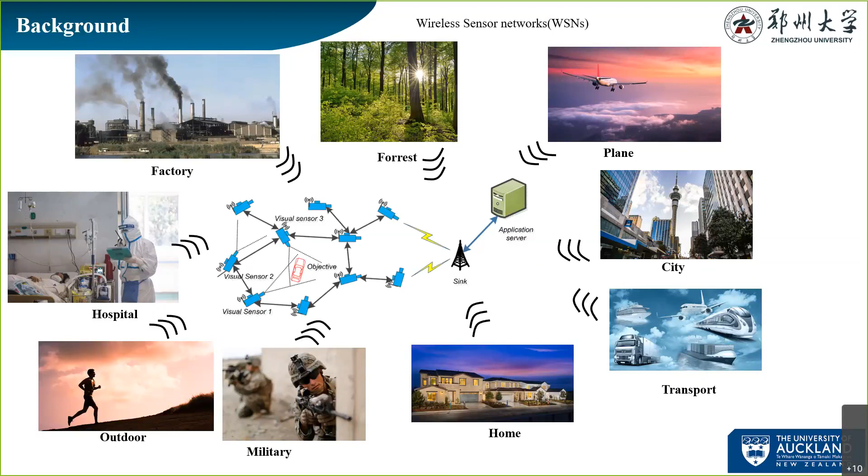Unfortunately, it is quite hard to power these sensors because there are large amounts distributed everywhere, and we need to power them continuously without frequently changing batteries. Fortunately, nowadays we have new technologies, for example energy harvesting, which can be used to power such low power grid equipment. Energy harvesting is low power, sustainable, and does not need battery changes, so it is a good way of powering wireless sensor networks.

Generally speaking, energy harvesting has the following ways: for example, solar, waves, tide, vibrations, wind, thermal, or radio frequencies. So let's summarize: energy harvesting is low power, continuous, and no battery changes needed.

But among these types of energy sources, I think wind energy or flow energy is very good because it is not constant for the weather.

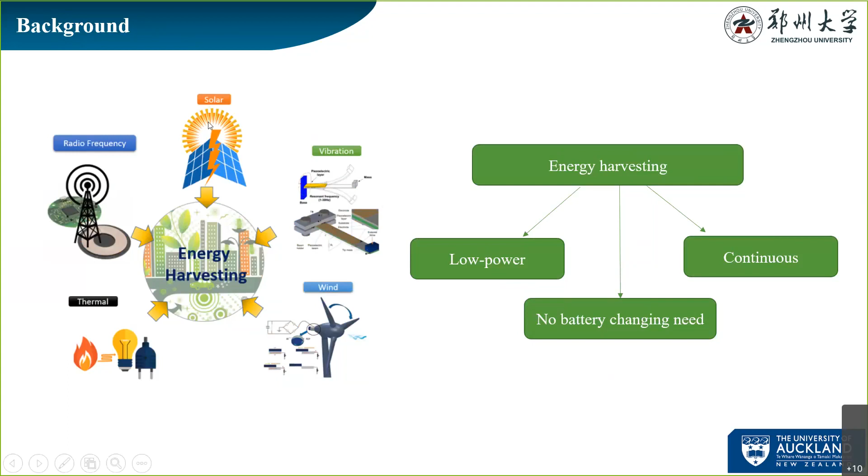However, for wind energy, some traditional wind generators are usually designed very big, as you can see, because it is based on the electromagnetic principle. The biggest windmill generator in the world is located in Denmark, type V164. It has a height of 220 meters, and its blade is as long as 80 meters.

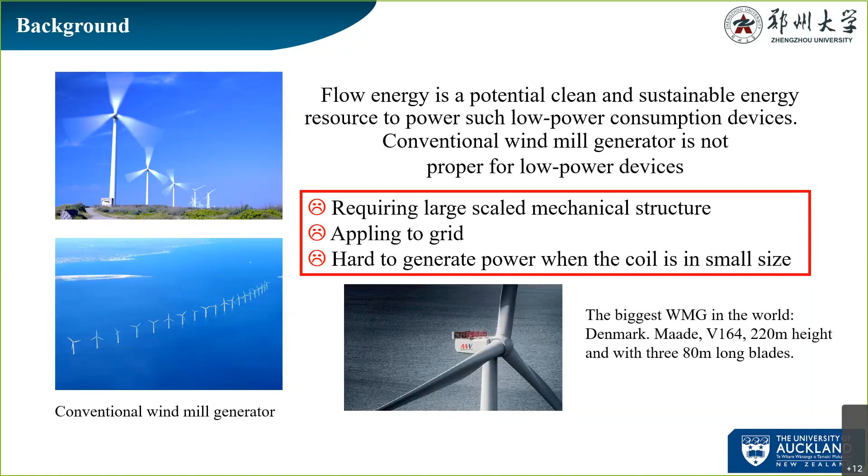But as mentioned before, we just want to power low grid electrical equipment, so we do not need such big size and big energy. So what do we do? Here we introduce flow-induced vibrations. As you can see from the pictures, the structure has been aroused to shake dramatically in wind or water flow, even at low wind speed. This is called flow-induced vibrations.

We must point out that usually, flow-induced vibrations should be treated as a harmful phenomenon that everyone wants to restrain. But here we can use it to generate power, because it can efficiently transfer flow energy into mechanical vibrational energy.

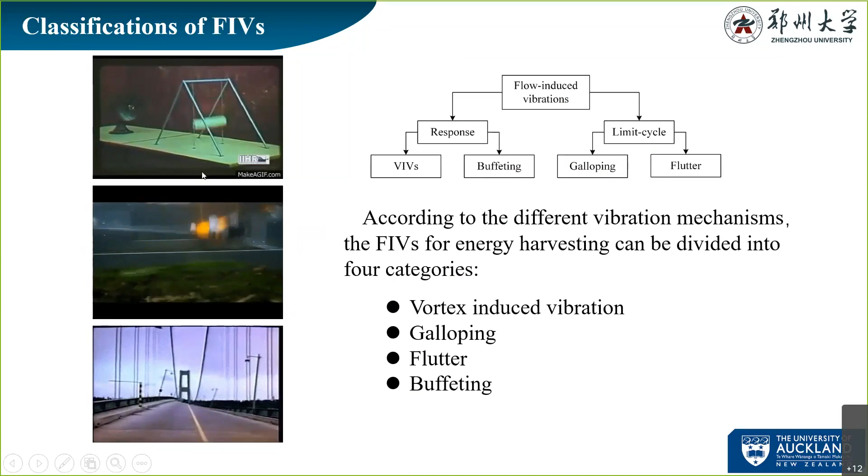Before we know what FIV is, we must know what causes it. As you can see from the picture, Karman first presented this concept in 1911, called the Karman vortex street. When the flow passes the bluff body, behind it will generate a periodical and alternative vortex shedding street, and this vortex shedding street can generate periodic aerodynamic force, comprising lift force and drag force on the bluff body.

And here we must clarify that: usually in our research region, a bluff body with circular round shape we call a cylinder, but if it is not circular, we call it a prism.

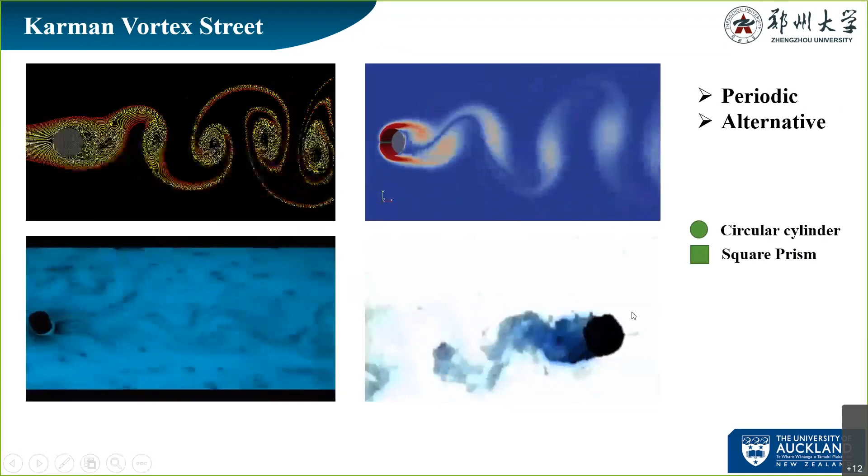As you can see, as a driving force on the vortex shedding street, if we put the cylinder on a spring and add some damping on it, it will become a typical mass spring damping system. And when the vortex shedding frequency gets very close to the natural frequency of the mass damping spring system, it will be aroused to vibrate periodically, and then it is called vortex induced vibration.

Now let's see what is the feature of VIV. There often exist three branches in VIV. Firstly, the initial branch. Secondly, the upper branch. And during the upper branch, one famous phenomenon can be observed. It's called lock-in, and then it will come to the lower branch.

In the upper branch, there exists a special lock-in phenomenon. If the wind speed is low, the bluff body does not vibrate much, the amplitude is very small. But if the vortex shedding frequency gets higher with increasing wind speed, and the frequency gets close to its natural frequency, it will be locked onto the natural frequency, and they will be resonant. During this stage, the vibration amplitude could be very large.

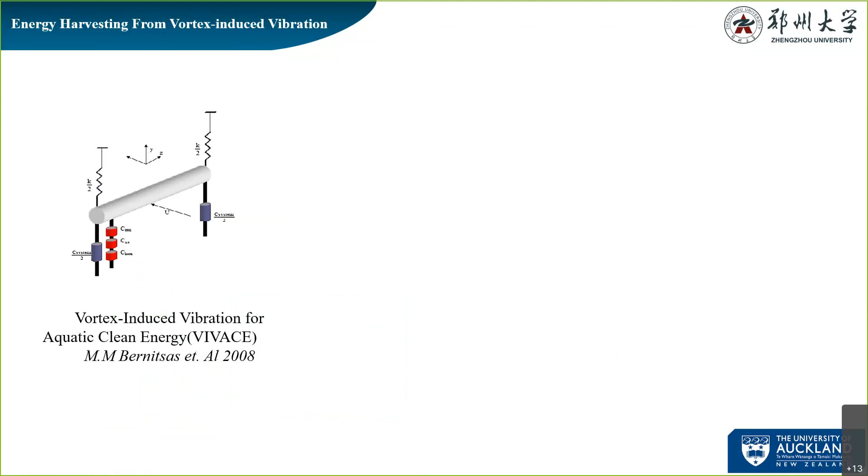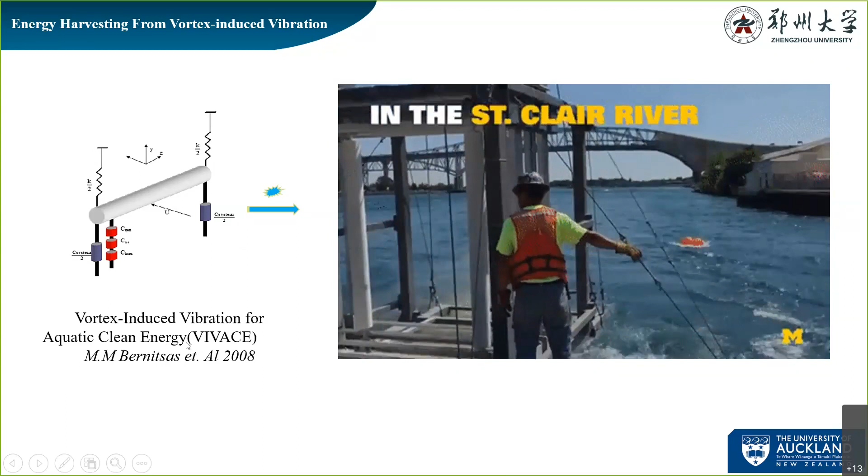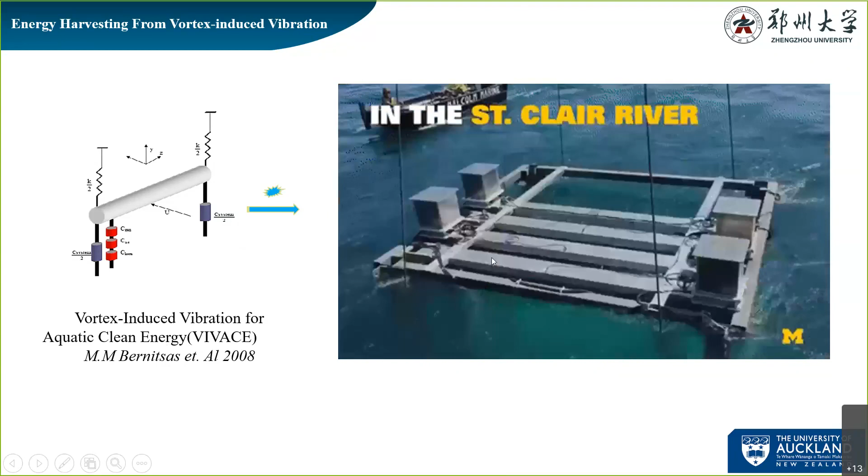The first proposed energy harvester from vortex-induced vibration was presented by Professor Bernitsas at University of Michigan at a conference. He first presented the concept of vortex-induced vibration for aquatic clean energy, also called VIVACE. As reported, the first prototype of this VIVACE has 3 cylinders, and it can power 4 homes per day.

After that, I want to introduce some mechanisms of VIV. As you can see, like other problems in mechanical vibration, we also need to add some semi-empirical equations to describe this problem. Firstly, I would like to introduce this one.

It is called the wake oscillator model, presented by Facchinetti in 2004. This model treats VIV as a kind of forced vibration. Why? Because they assumed that behind the cylinder there exists a wake oscillator, and this oscillator can give energy to the cylinder, making it vibrate, so it is treated as a forced vibration.

How do we reflect this in the equations? The first governing equation is about the cylinder, about its motion, and the second equation is about the assumed wake oscillator. Here you can see that.

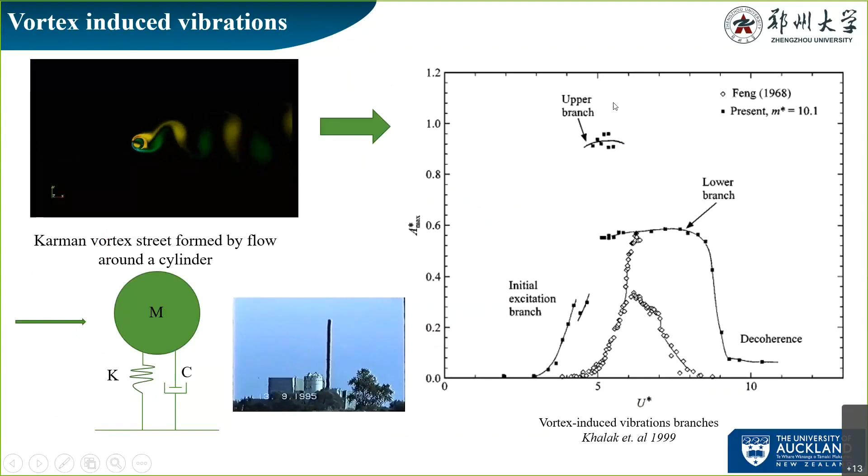That's because, if you look at this, they added some obstacles on the bridge this time, and these obstacles changed the cross sections of the bridge. So it altered the vortex vibrations of the bridge, and it just entered this region. Before, the bridge was in this region, and now it enters this new region, so you can see the amplitude is quite big.

So we have comprehensively talked about the model of a system with one single cylinder. You can see that's only one single cylinder here. But what will happen if we put not only one bluff body?

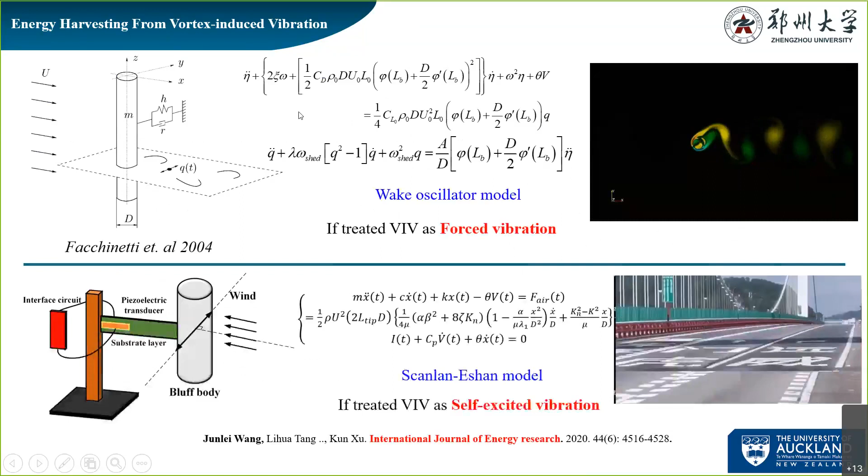Professor Facchinetti also proposed a model of two cylinders arranged in tandem. He thinks that the vortex shedding from the cylinder in the front can effectively influence the vibration of the second cylinder. You can see from these equations there is interaction on the second cylinder. That means the first one still acts as a single cylinder, controlled by these things, but the second one is controlled by both the wake oscillator model and the vortex shedding effect.

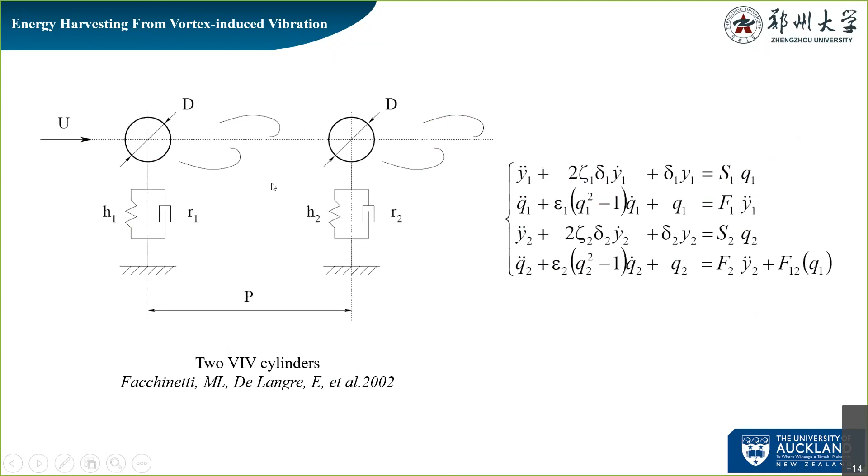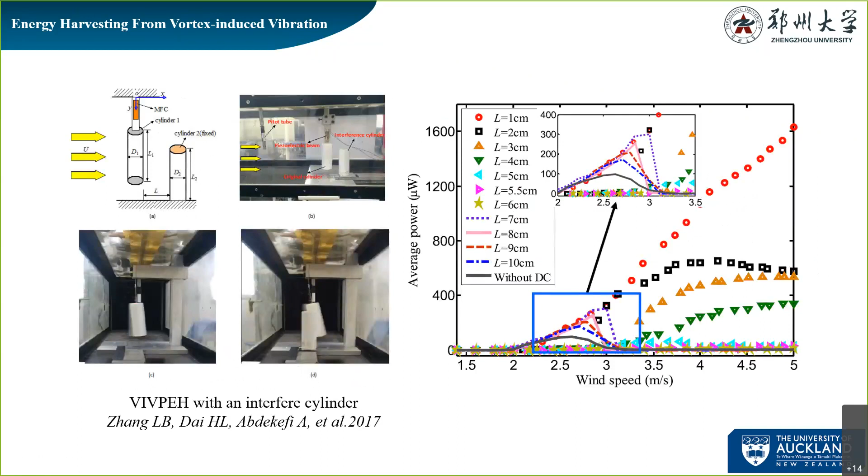So what do we do? It is not easy to model something like this. What can we do to accurately build a governing equation to model such a VIV problem? We can use CFD. CFD technology is very good at solving these kinds of problems.

In CFD there are some important points. Firstly, we must justify whether it is laminar or turbulent flow. In this region, some think the judgment point is whether the Reynolds number is above or below 180, but some say the number is 500. Not sure.

There are quantities of CFD technology, but the most commonly used can be divided into, I think, two types: firstly the finite volume method, and second the lattice Boltzmann method. And about turbulence solving, we can use some, for example, large eddy simulation, Reynolds-averaged Navier-Stokes, or direct numerical solution.

When we talk about Reynolds numbers, because it is a very important number in CFD study, if it is higher than 180, commonly a three-dimensional simulation should be conducted. But if you just want to get the lift force or the vibrational amplitude of the cylinder, a two-dimensional simulation is also, I think, enough. But if you want to accurately get the phase or other things, I think 3D simulation is important.

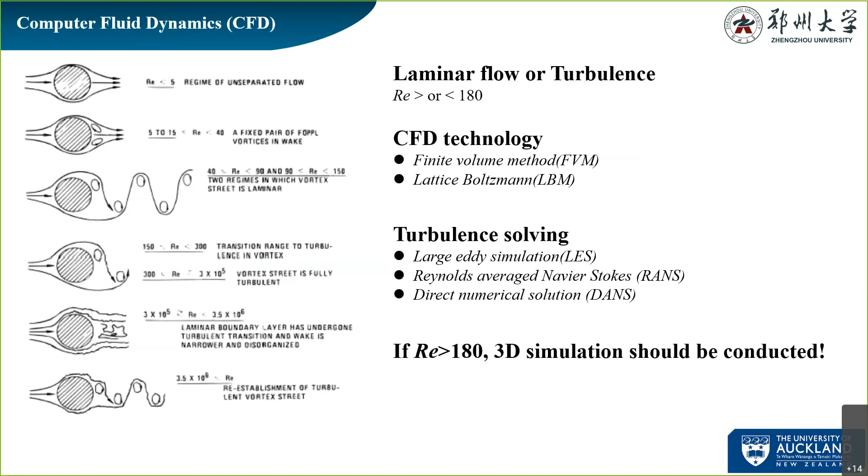So why do we use CFD? From this picture, you can see a typical example of simple vortex induced vibration, and you can see there exists a pair of vortex sheddings in a single period. It is interesting that the blue color presents rotation that is negative, and the red color presents that the rotation direction of the vortex shedding is positive. You can also get the velocity vectors from this picture. It is very real, I would say, not just some easy equations.

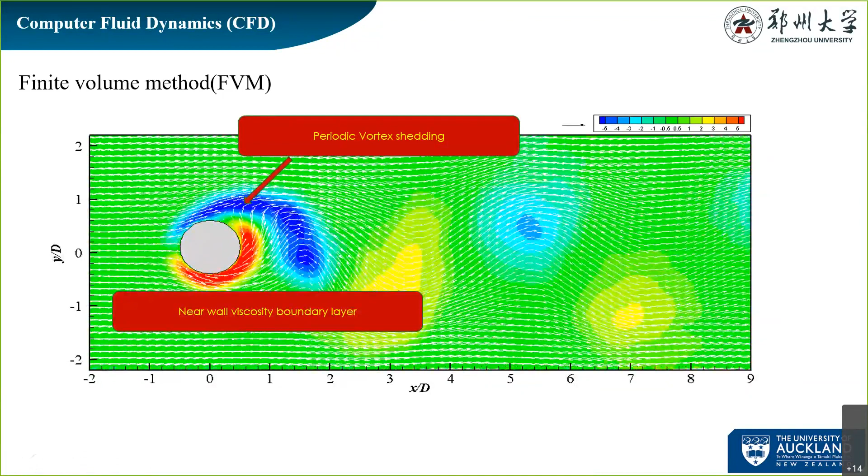Let me introduce some of our recent works. We used the software Fluent, which has a good technology called overlap grid. What does it mean? The green one is the original grid. If we compute a flow-induced vibration problem, we must deal with the problem of grid or mesh distortions - the mesh will easily be broken, and the simulation will be stopped.

But here we use a new overlap grid. That means we put another grid on this hole, and it can transfer some data from the vibrations and the flows. So we no longer need to solve the moving grid to deal with mesh distortions.

Here is a flow chart of the working process. As you can see, firstly we can generate some raw grid and start to assemble the grid. So we dig holes here, and then optimize the hole surface. Then we can establish, for example, this red grid - it is called the overset grid - and transfer back to the assembled grid. Then we set boundary conditions and simulate. At last, we need to judge if it has converged. If it has converged, we can stop the simulation and it is finished, and we can get what we want.

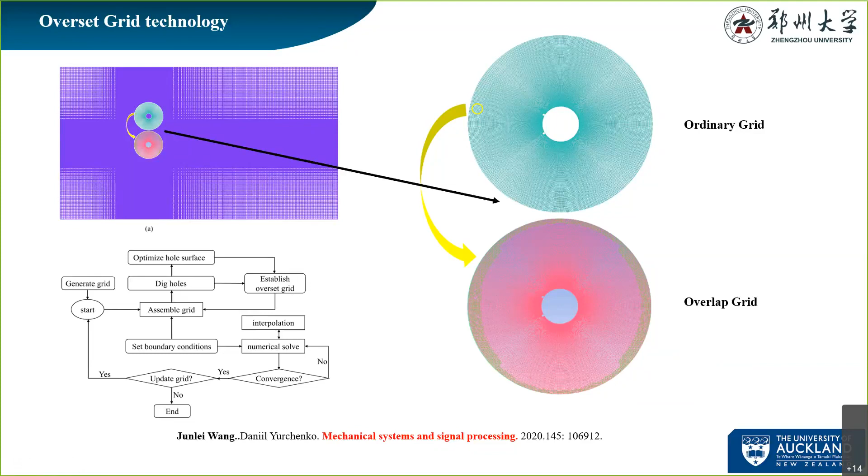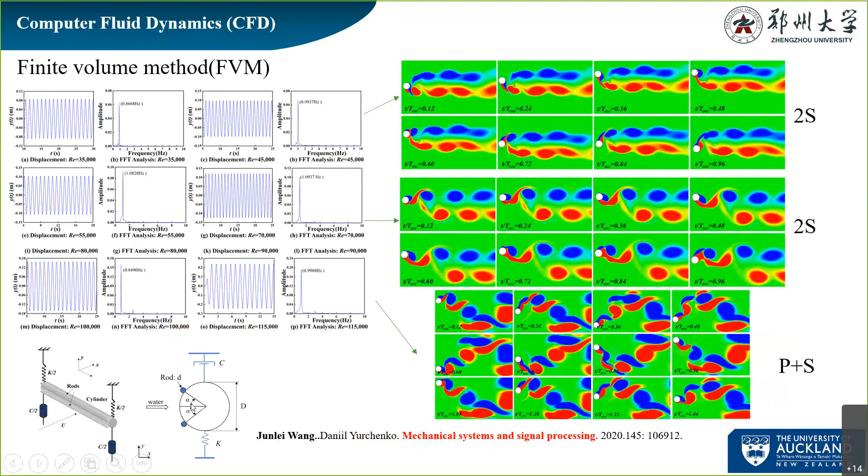Okay, this example contains only one cylinder. If we put in multiple cylinders, what will happen? As we mentioned before, CFD technology is very good at solving such problems. Here we also add an overlap grid to solve this.

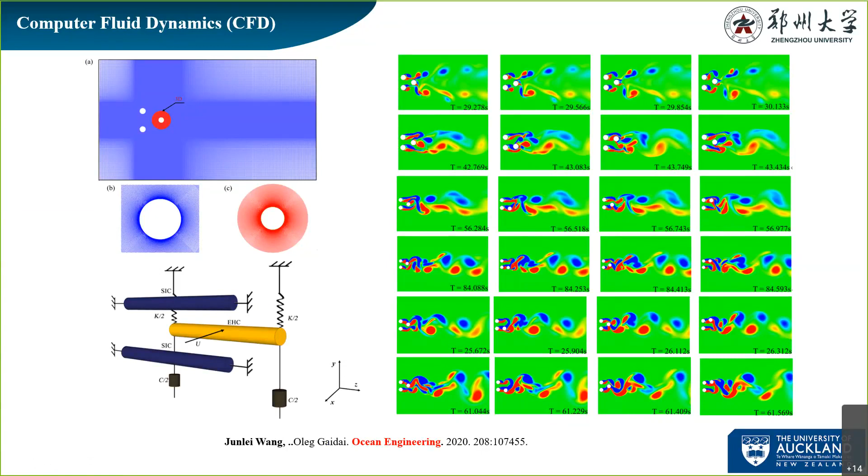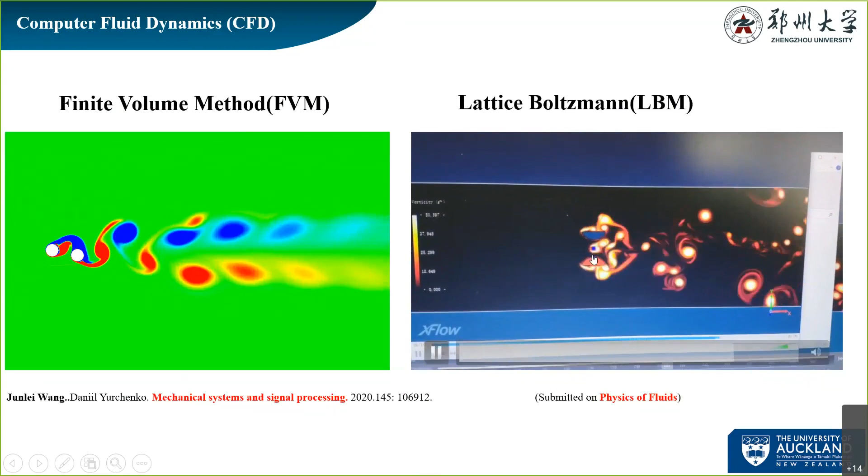And here you can see if we use the lattice Boltzmann method, we get that. Firstly, we do not need a high grid - it is a grid-free platform. It just has a lattice. I think this is good for solving some very hard computations.

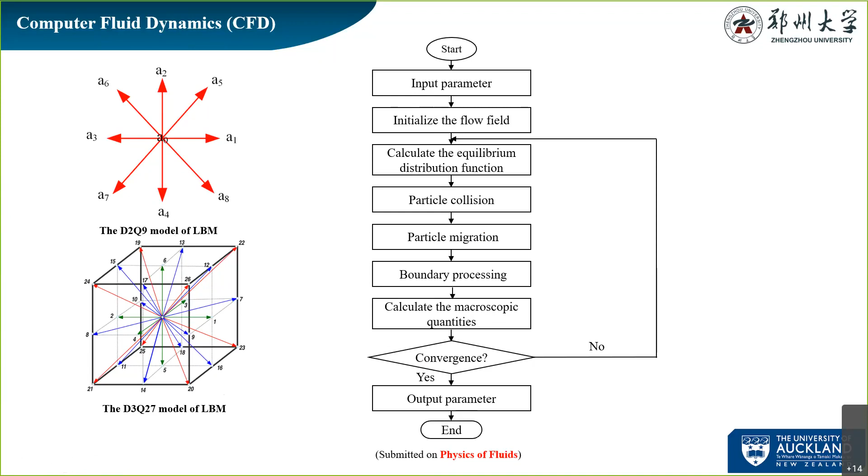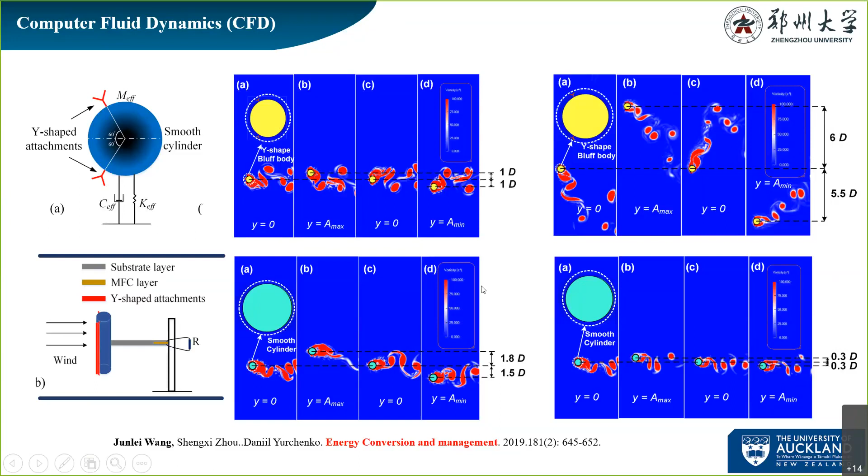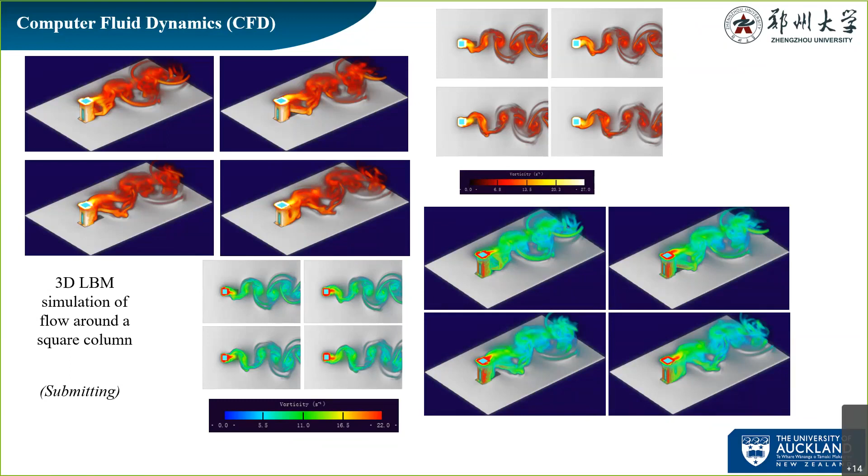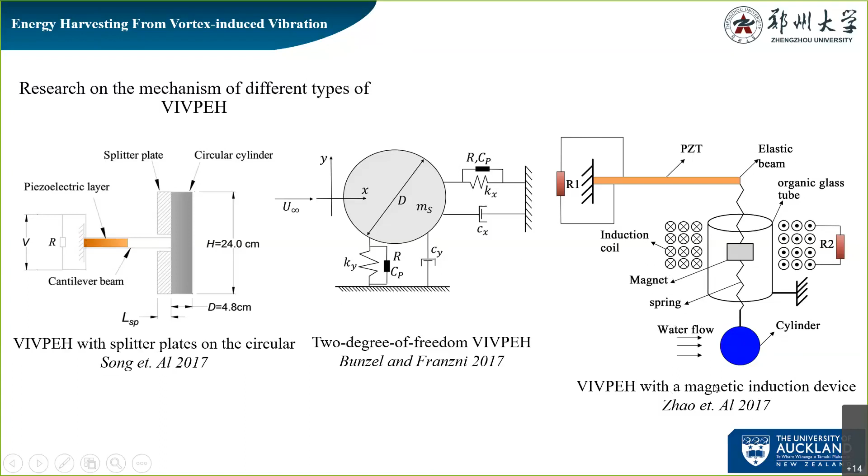Okay, let's summarize the benefits of VIV energy harvesters. Firstly, it has a typical lock-in phenomenon, so it performs high voltage output in the lock-in phenomenon in the special wind speed region. Secondly, we can design such energy harvesters into a very small size, so they can work individually - we do not need to apply them in a grid. That means we can use it at our home or take it with us. And at last, I think it's very important for VIV energy harvesting...

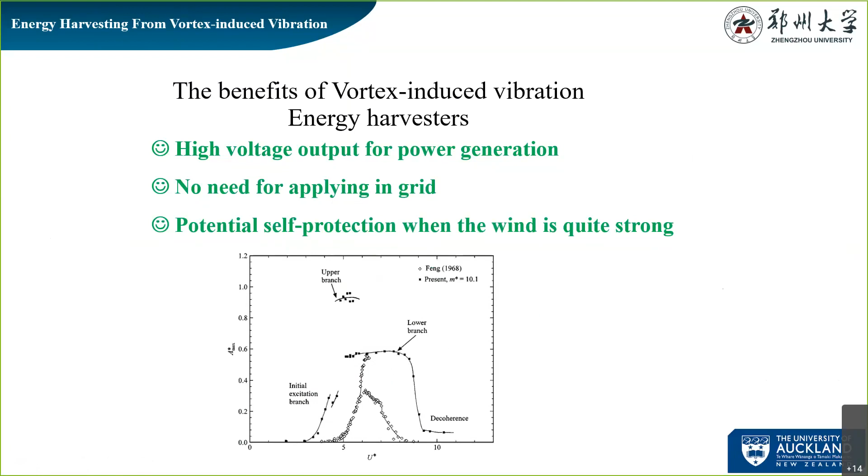...because it has a lower branch, so if the wind speed is quite strong, the vibration will be suppressed. That means if the wind speed is quite strong, the system can protect itself. It will not be damaged even if the wind speed is quite big. Okay.

After talking about VIV, I would like to introduce galloping. As you can see, galloping is a velocity dependent damping controlled instability. This picture is very easy to let people know what is galloping.

Imagine this is a wire line. Firstly, the cross section is round shaped. So it will happen typical VIV. Why do we see that? Because the direction of the movement, or the velocity, is always opposite to the aerodynamic force. That means when you move down, you can inverse the aerodynamic force to the up direction. It will stop you getting very strong.

But if the wire is coated with, for example, ice or rainwater, the cross section has been changed into some shape like this. So what will happen? It will happen that the direction of the velocity is the same as the aerodynamic force. That means if you move forward, and someone has pushed you to move, the movement will become stronger and stronger. So as you can see, the system will be damaged.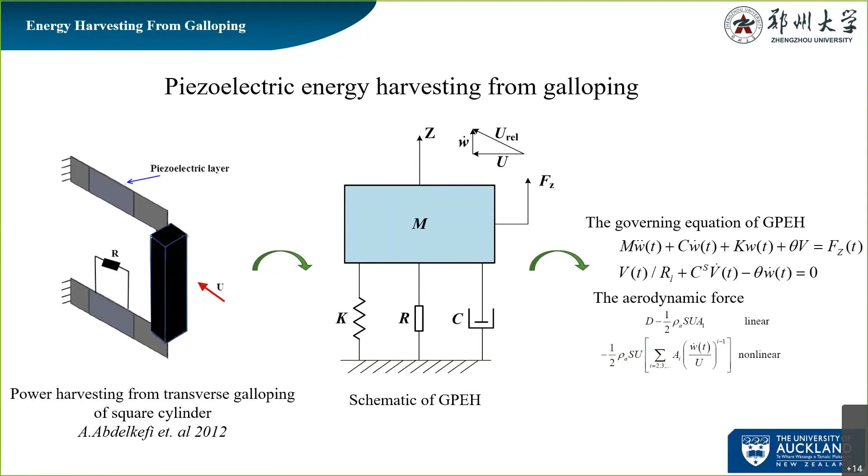So let's summarize the benefit of galloping for harvesters. It is a low frequency and high amplitude oscillation, which means we want high power. If we want a very high power value, we can use galloping. And the amplitude increases with increase of wind speed, compared with VIV. There are two different types of flow-induced vibrations.

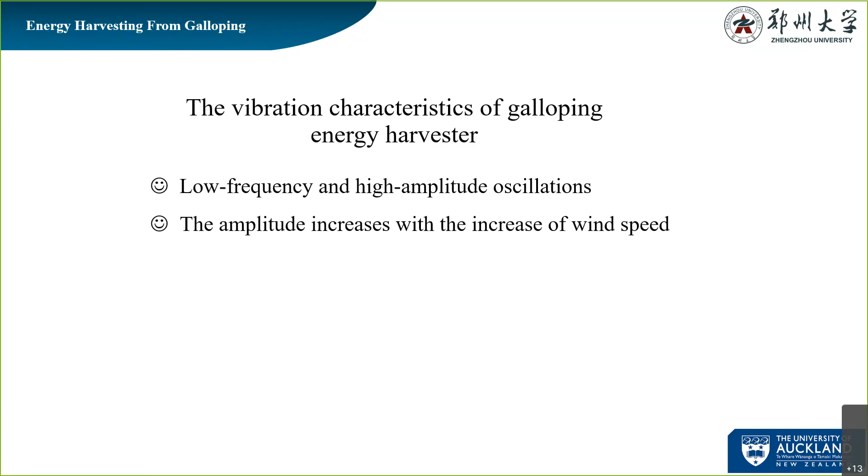We did some experiments to investigate what will happen if we put attachments on the smooth cylinders. We will see that galloping will be aroused. But if we take off the attachments, it becomes back to VIV. That means if we design such an energy harvester, if the wind speed is low, we can take down the attachments. If the wind speed is quite high, we can put on the attachments to harvest the different wind speed energy.

Then we did some other studies to further develop the energy harvesting performance. For example, we added some magnets to make the system become bistable. By using this configuration, what we found was about the second beam, shown here.

The second beam, firstly without the magnets, can only work at about 2.5 meters per second. If we use the magnets, we can find that the cut-in speed will get down to 1.9. This is very good for enhancing the performance of energy harvesting.

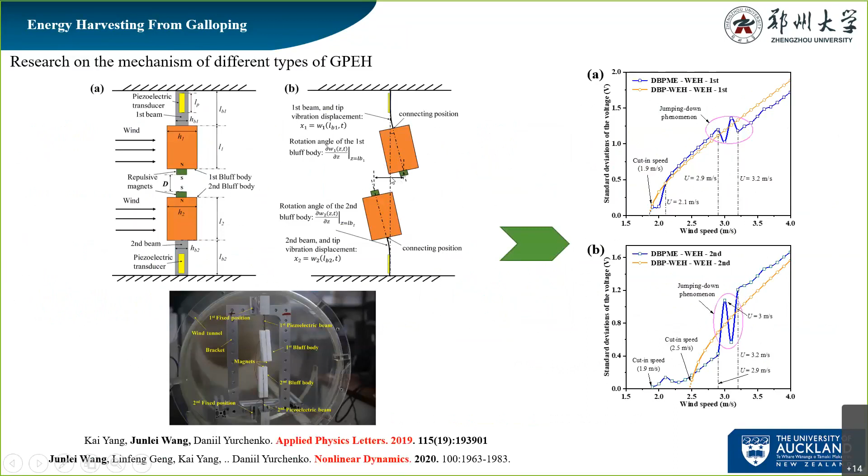But if you enhance the wind speed, that means you add more wind energy to the system, the vibration will get to another potential well. It will break out of the first potential well, and it has two equilibrium points, right? So the amplitude is sometimes positive and sometimes negative.

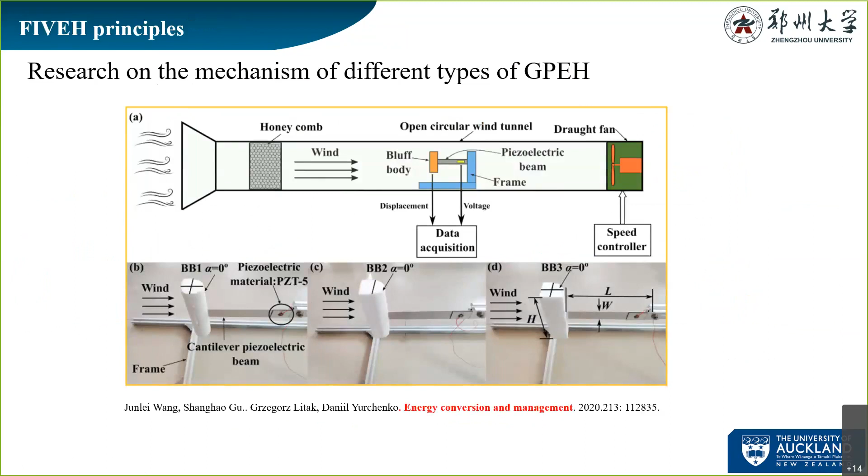Then we imagined what would happen if we combined VIV and galloping, because for simple VIV there is always a round shaped cross section, and for typical galloping it is always a square prism. So we combined the bluff body into this shape and comprehensively did a parametric study.

Fortunately, we found that such a shape of bluff body can efficiently enhance the performance at the traditional wind stage. That means you can see this red line here.

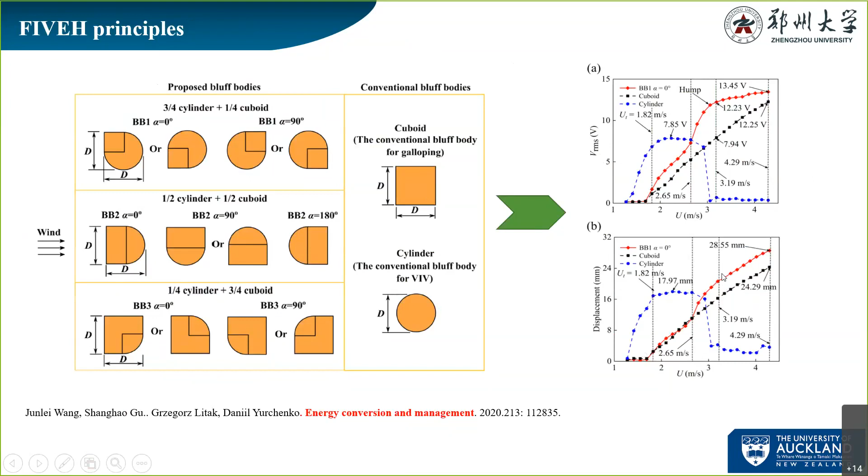We have done some other works. For example, in 2015, Dr. Lihua Tang presented the equivalent circuit study of galloping energy harvester. This function is very normal in energy harvesting from fluid-induced vibrations, but the hard point is that we often treat it as a simple resistance, only as AC.

But if we use DC, this function equation is impossible to solve. So we used this method to solve this problem. We can solve not just AC, but also DC and some other types of circuits, for example SSHI, SCE. So this year we have solved this lack.

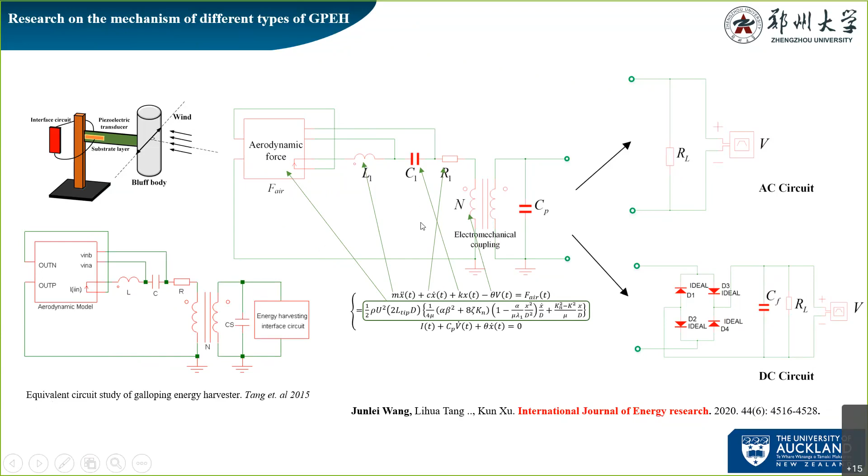We have also done other studies. For example, we studied the position influence on two galloping energy harvesters, and we solved for different incoming wind directions into the energy harvesters, so this design can harvest energy from any wind direction.

Zhao Liya has studied this combined approach. She combined the galloping vibration energy harvester with normal base excitations.

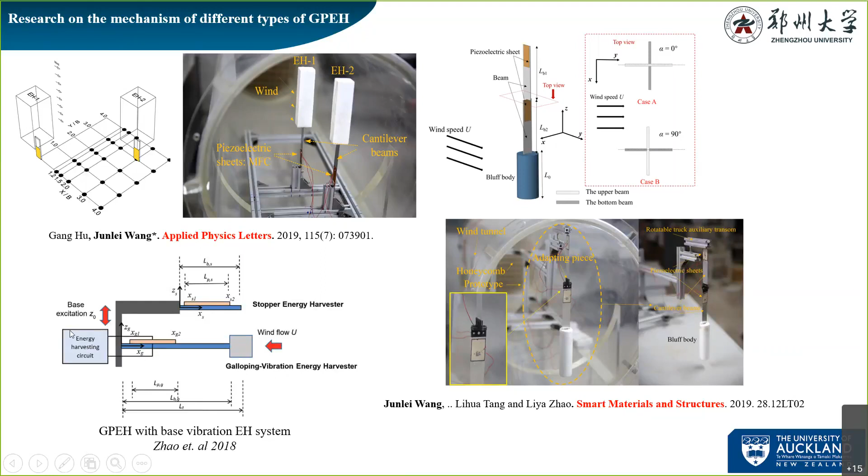Next, some application examples of fluid-induced vibration energy harvesters will be introduced.

This company, around 2014, was first in Spain—it's a Spanish company. It firstly designed a vortex bladeless wind turbine. As you can see, it's bladeless, and they used the principle of vortex-induced vibration. This is maybe the first time I've seen someone build a product using fluid-induced vibrations.

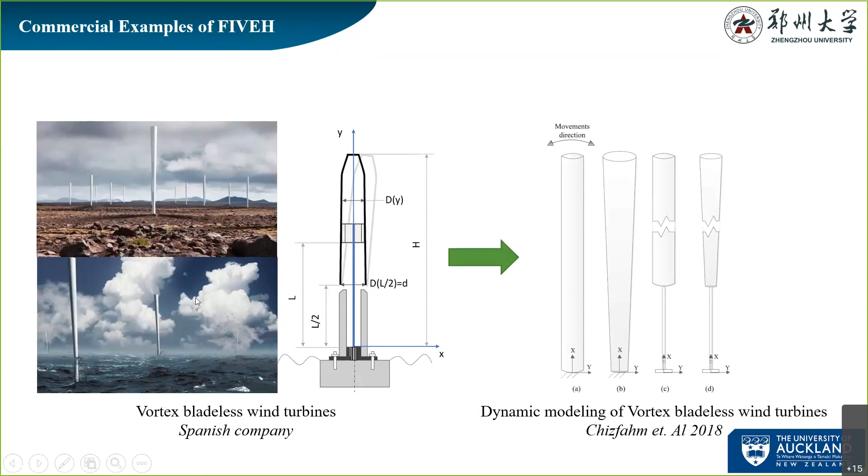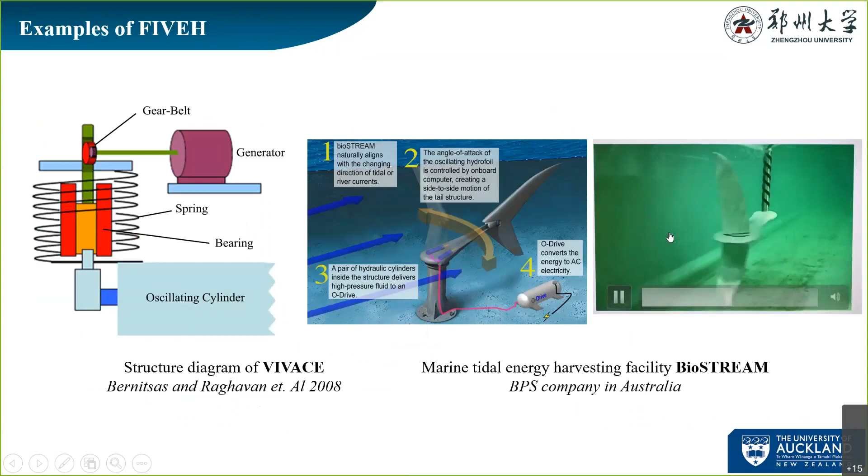And this one is the BPS company in Australia. They designed a fish-like biostream device, called biostream, to harvest water energy. And this one is designed to harvest tide energy offshore.

And this one is designed as a self-powered temperature measurement system using piezo flags.

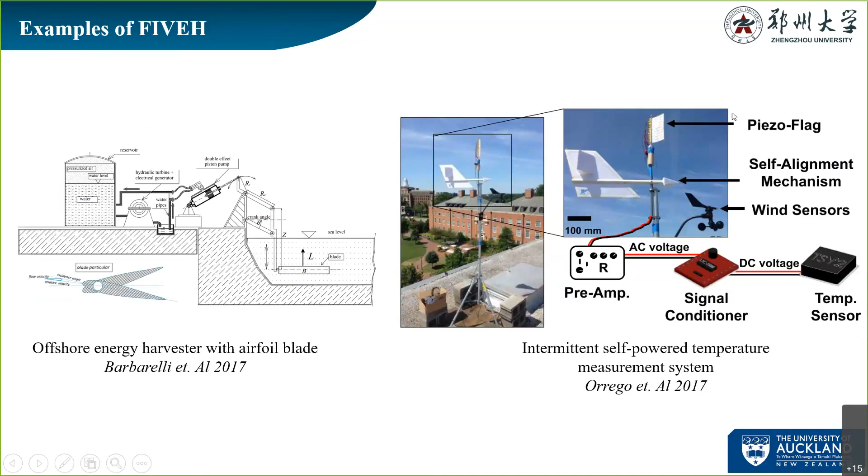I think there still exist some challenges in fluid-induced vibration energy harvesting studies. Firstly, the theories of FIVEH energy harvesting is still not complete. And the flow field is very complex, especially regarding turbulence problems—it should be further studied.

Secondly, I think almost everyone is concerned about the efficiency of energy harvesting. But to tell the truth, I don't think efficiency is very important, because we just need to power some very low-power grid equipment, and we just need it to be sustainable so we don't need to change batteries. So I don't think efficiency is that important.

But if we can find ways to enhance efficiency, it would be very nice to improve this energy harvesting performance, and we can design more prototypes to make it into a production or other things.

And lastly, there's cost. The cost is still very high for me because I usually use piezoelectric energy harvesting, and the piezo sheet is very expensive. For MFC it's about 100 Euros for one piece. So the cost is still high.

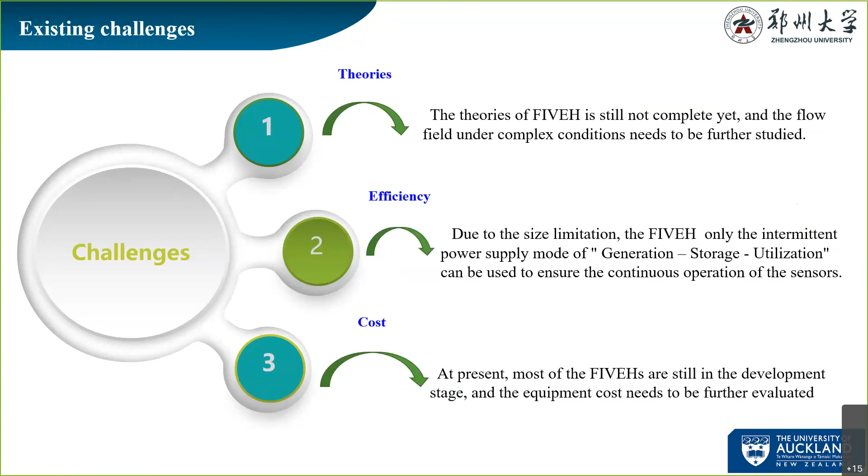So I'd like to make a conclusion of my presentation. Harvesting energy from the ambient environment has a very good perspective because the energy is clean, endless, and unstoppable. FIVs are also a good medium to transfer flow energy into mechanical vibratory energy because of this resonance phenomenon.

And we can use some technologies to enhance or combine energy harvesting from FIV. For example, nonlinear technologies, intelligent regulating elements, hybrid energy harvesting, some new materials, and combining with wave energy harvesting, because wave energy always exists.

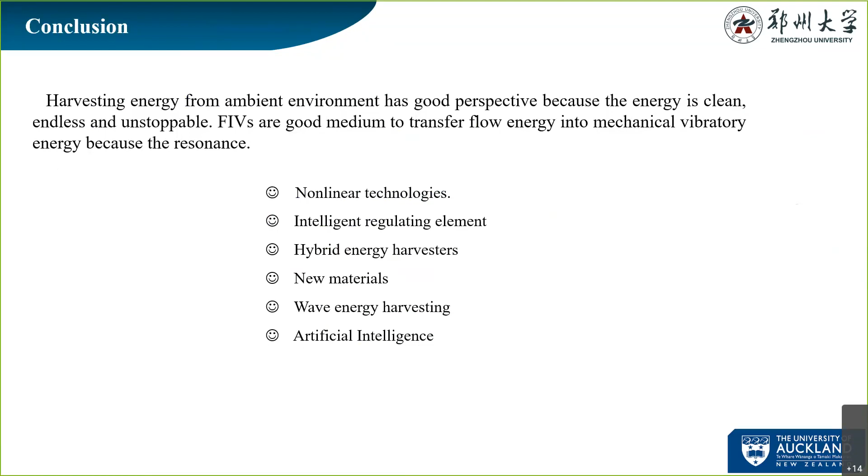And lastly, I think nowadays it's very popular in the USA and in China—many researchers have started using artificial intelligence, for example machine learning and deep learning, to find the relationship between some fascinating phenomena.